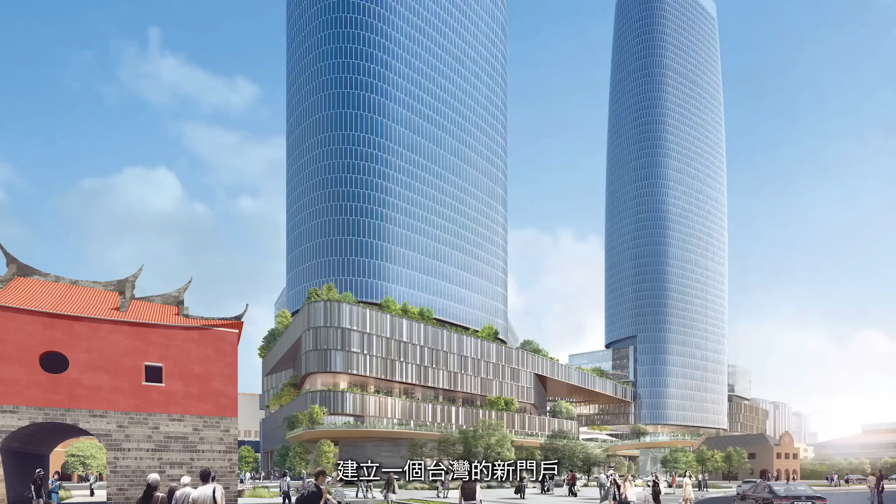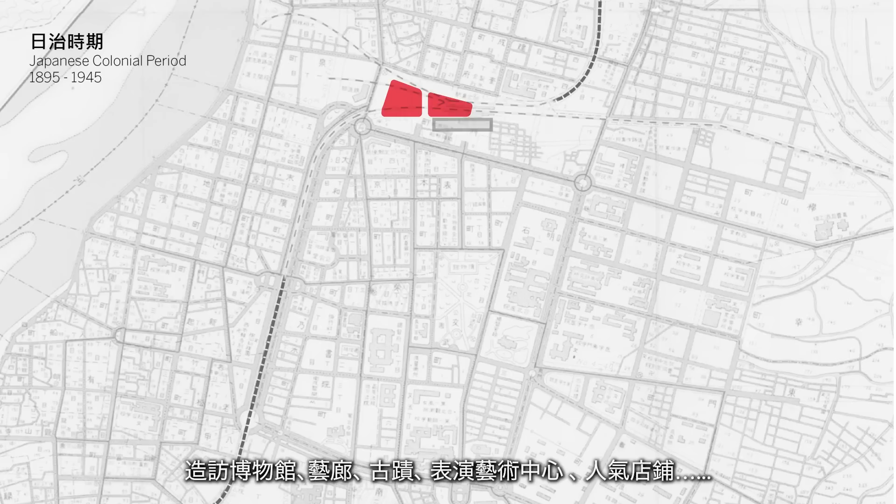Neighborhoods like this one, rich in amenities that bring together diverse populations as they visit museums, galleries, historic sites, performing arts centers, vibrant retail, and significant open spaces, are becoming increasingly valuable as people are more willing to embrace history.

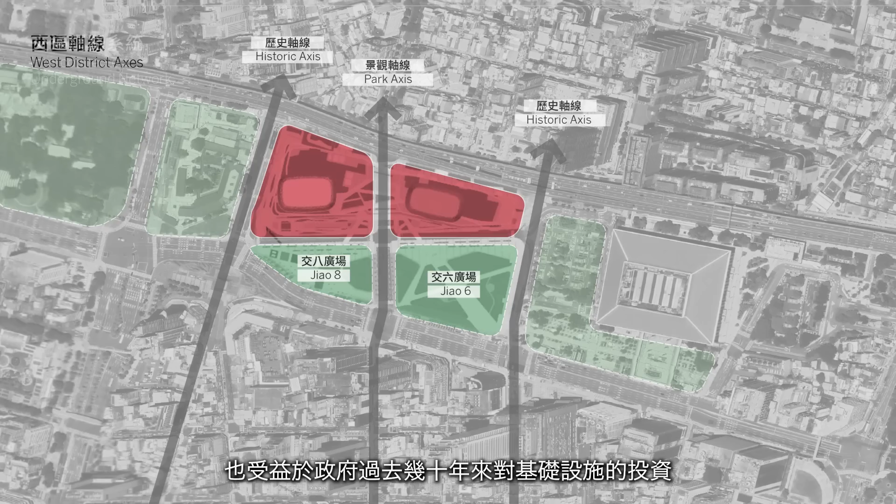This terrific site benefits not just from its history, but from the investment in infrastructure that the government has made over the last decades, including the new rail line and station linking this site to the Taoyuan International Airport. These important new links will weave together this development into the fabric of the city.

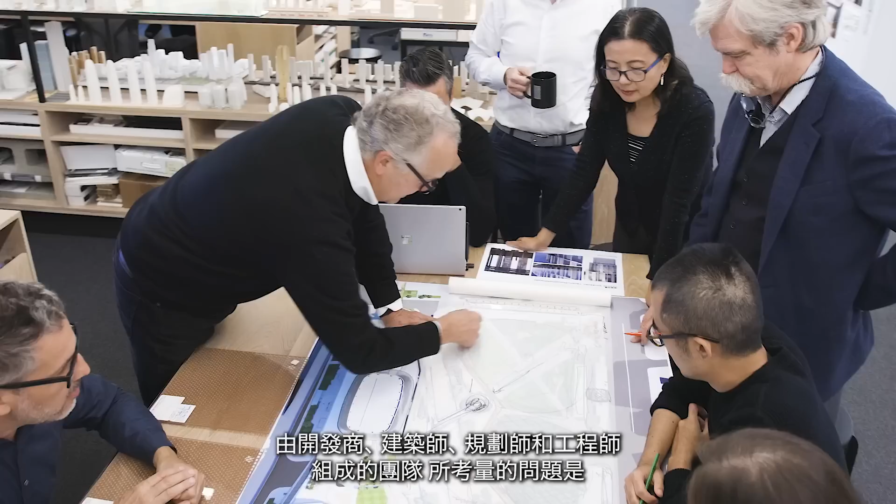The question for our full team, as developers, architects, planners, and engineers, is what is the most appropriate solution for the site? One that represents the welcoming and entrepreneurial spirit of Taiwan, one that redefines the skyline of Taipei, and one that establishes a new identity for the West District.

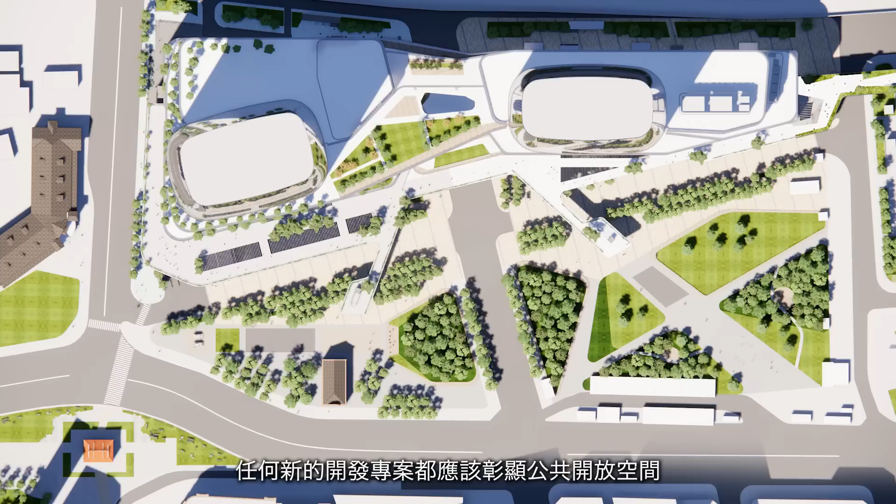We looked to many things for inspiration, but what resonated most with us was Taiwan's unique geography and natural resources, and the relationship between the Taipei Basin and its surrounding topography. As the city of Taipei has expanded, nearly the entire basin has been filled with buildings, making the surrounding hills and landscapes particularly precious. We believe that to preserve the exceptional character of Taiwan, any new development should celebrate open space and develop a strong integration between the natural and built environments.

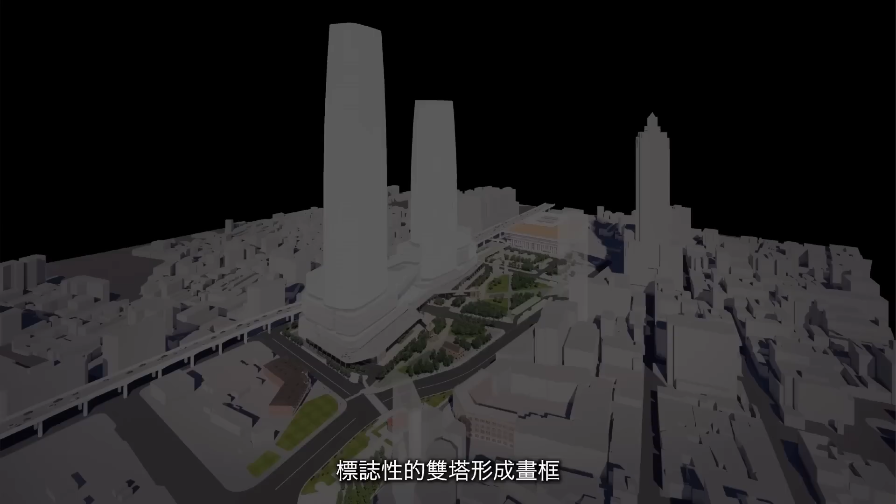The project works on two levels. On the ground, it creates a connection for the historic buildings and the districts. And above, it creates the conceptual link and visual connection to the Qixing Mountain. A pair of signature towers frames the view, bringing the landscape down from the mountains to the towers, as well as up from the park into the public spaces of the building.

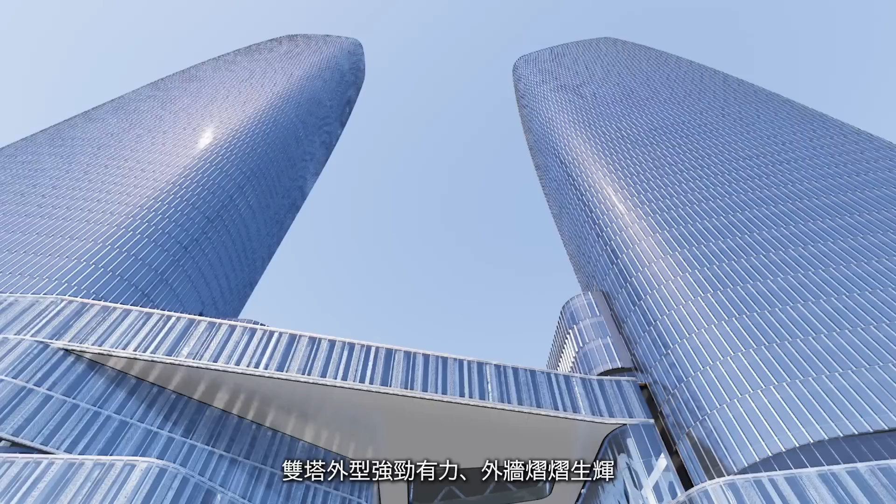The floor plans of both towers are elongated ellipses with broad faces to the north and south for optimal daylighting. The curves of each corner help reduce the apparent width of the towers and prevent them from forming a visual barrier between the historic city and the Qixing Mountain. The bold, powerful shapes of the tower are reinforced by the shimmering building skin that rises above the landscape and marks this as the gateway to Taipei.

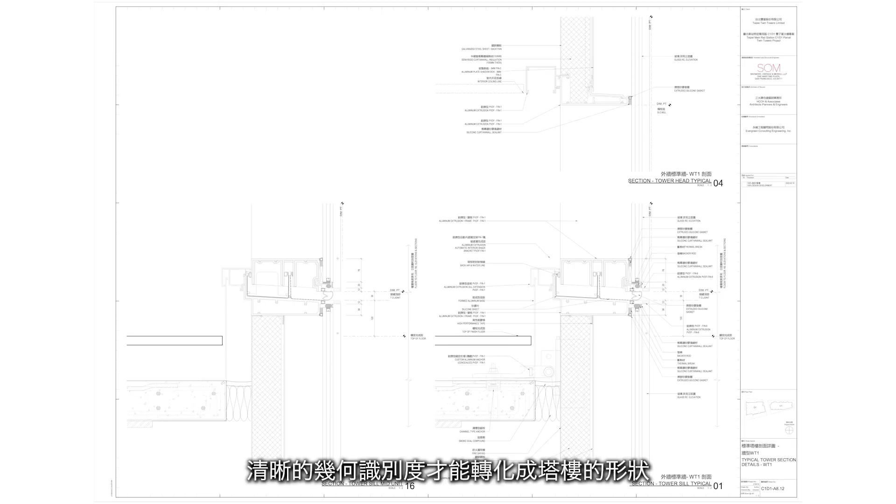The unique tower shapes are informed by the needs, which is the building use, the occupancy—those are must-haves. It's also informed by the wants, which are more of the attributes of what it wants to promote visually. The exterior enclosure design to achieve that also has needs and wants. In the design, it was critical to establish the geometry for the tapering form so that it could be readily identified and transferred to achieve the tower shape.

From there, through an iterative process of design, detail, and communication with the client and with local builders, materials were selected to achieve the visual objective and to provide the tapering tower form in a custom, unique enclosure that's designed specifically for this building, for the Taipei climate, and for all of the elements that it needs to address.

The two towers generously taper in form, gradually opening up to the sky and the views, while creating a welcoming gesture that holds the National Living Room.

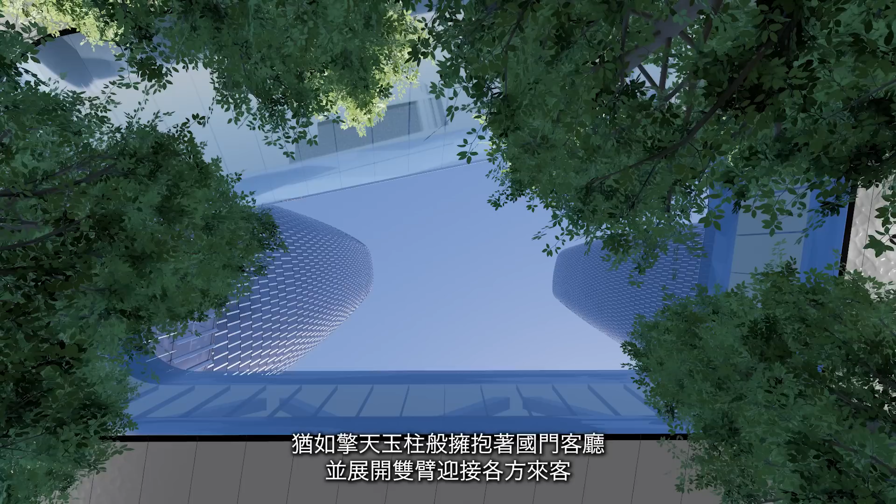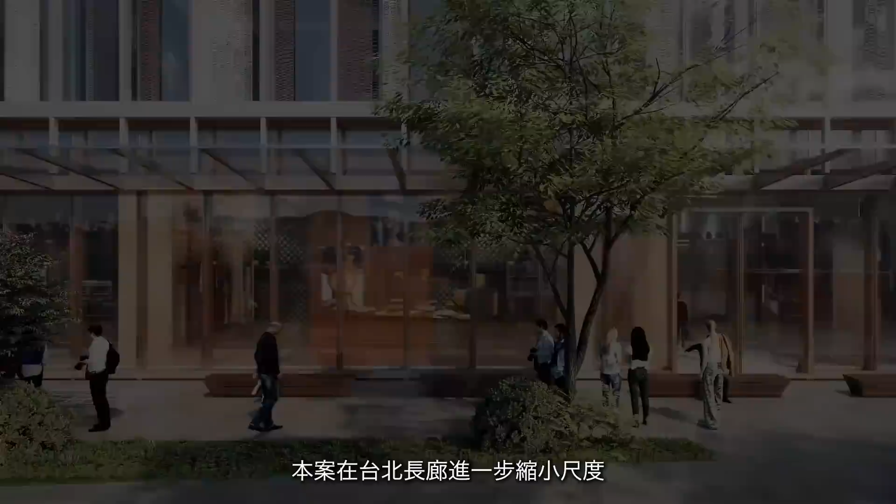The podium at the base of the towers scales the building down to the scale of the city and creates an important massing relationship with the adjacent Taipei main station. The project further scales through the Taipei corridor, which scales the project to the historic fabric into the park below.

This element, which stretches nearly 1 kilometer from the main station to the west side of the project, was really inspired by the city's shopping arcades. It consists of a double colonnade. It's a 2-story element.

It has elements of open-air trellises, and we hope through these elements it helps to recapture some of the atmospheric qualities of old Taipei. Because this is really the heart of the city, the heart of Taiwan, we want to make all levels of this project open to the public. We want to be able to allow people to ascend from the street level to the top of the podium without ever having to enter the building, and this is done through a series of really incredible landscape elements.

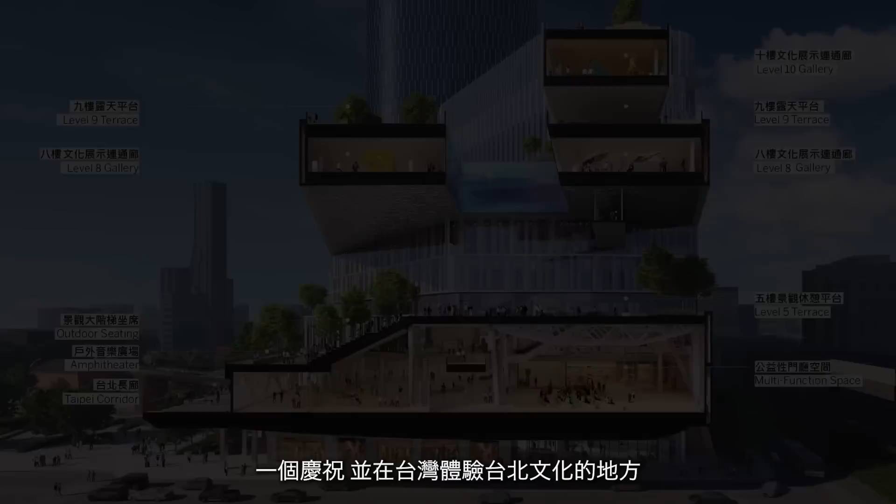The main feature of this sequence is the National Living Room. We see it as a multi-level event space, open 24 hours a day, a place for people to gather with friends and family, a place for celebration, a place to experience the culture of Taipei and Taiwan.

The National Living Room has a monumental stair that cascades down and forms a natural amphitheater. It flares open in plan to embrace the park and allow events to span across elevations. On the north side of the National Living Room, it opens up views to Qixing Mountain, incredible views.

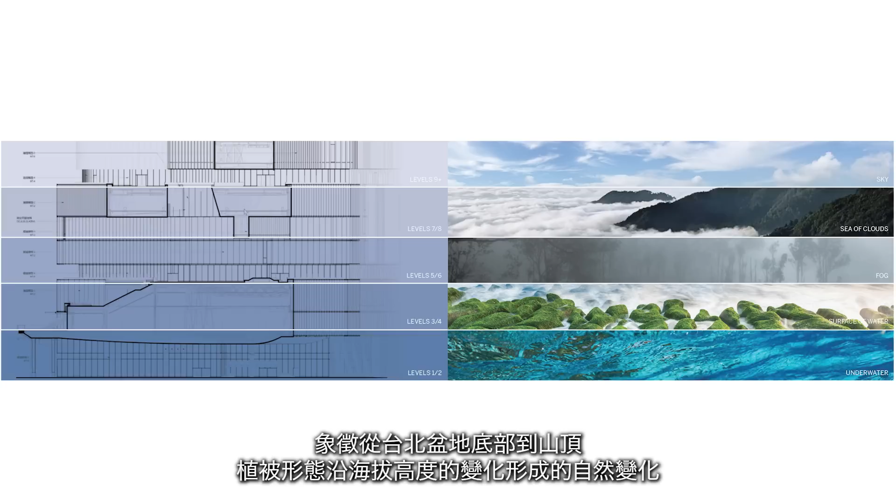As you ascend through the podium, the character of the landscape transforms, meant to mirror the landscape transforming through the Taipei Basin from the base to the top of the mountains. The National Living Room will be the heart of the city, an adaptive, transformative space that can accommodate all kinds of uses, from daytime lunches and marketplaces to events, concerts, and performances, to more formal events and celebrations.

Beneath the podium and in the foreground of Taipei Twin Towers is a public park, which hosts the Mitsui Warehouse, the Post Office, the Train Museum, and Taipei's historic North Gate.

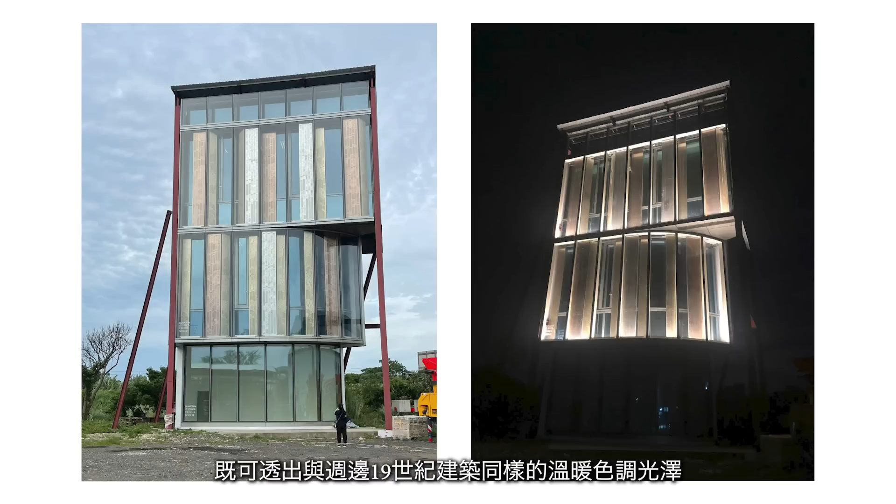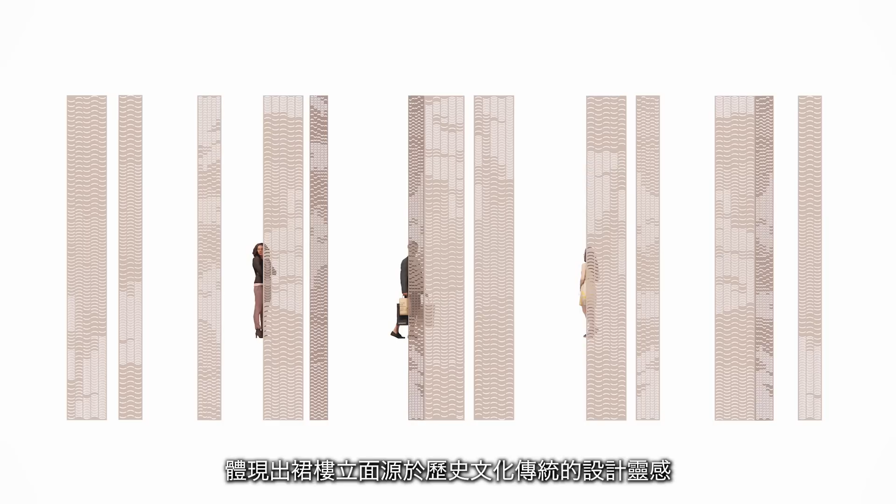Many of the attributes of the podium facade are inspired by these historic landmarks, notably its dynamic double-skin curtain wall, which glows with the warmth of the surrounding 19th century architecture while allowing daylight into the building. The copper and silver-hued metal screens of this facade, set into layers of glass, elaborate on the historic and topographical inspirations for the podium, with decorative perforations that evoke the wave forms of tea fields and the curves of stacked ceramic tile roofs.

We developed a dual wall, two layers, an outside and an inside, with movable interior screens to promote visual transparency, and to promote a dynamic and ever-changing exterior wall that will also accommodate and address the unique cultural aspects of Taipei and this site, and the climatic aspects of Taipei with its unique climate environment.

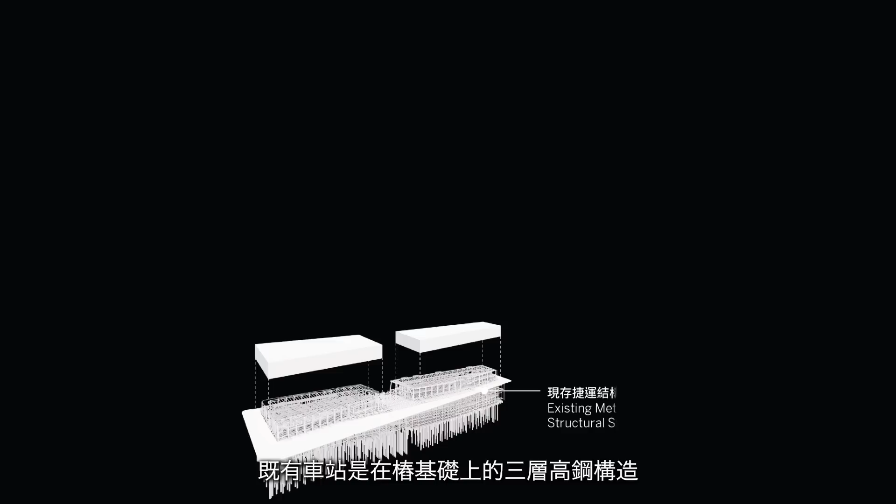One of the unique challenges of this site was to take two very tall buildings and create a structure that addressed the use of those towers, and then create an idea that transitions that structure into the existing train station that is active, which has three levels of structural steel built on pile foundations.

So what we did is create an idea that allowed our towers to actually be even taller than the ones originally designed, but shaped them in a way that allowed for the loads to be balanced and use the existing structure with very little change, with ideas that this structure could be built while the train station remained in operation.

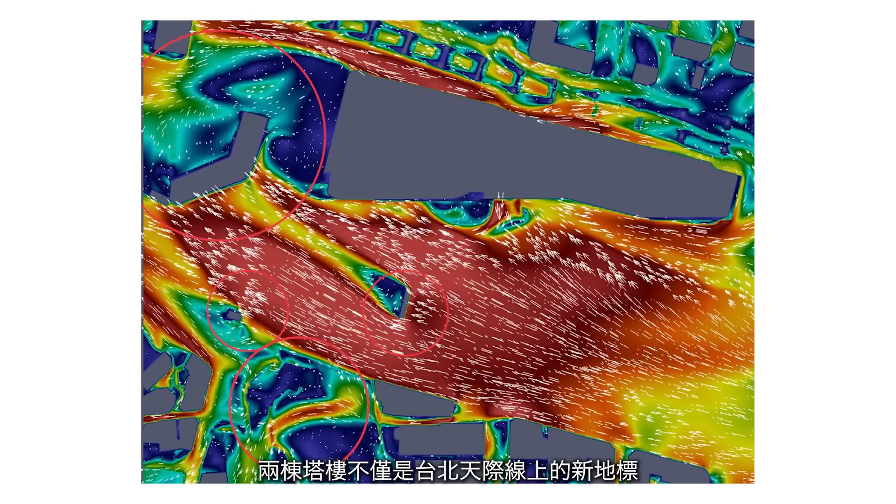The towers are not only iconic on the skyline in Taipei, but they're engineered to be aerodynamic. Typhoon winds in Taipei are significant, so what we've created is a structure that is elliptical in plan but also tapers over its height. In doing that, we're able to minimize the demands on this new structure, even allowing the towers to be taller than the original design for the site.

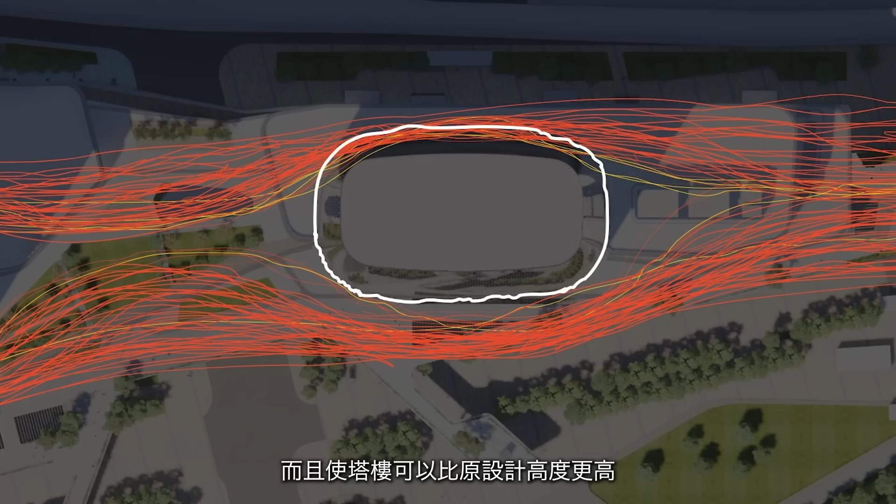Since the winds are so high in Taipei, we've come up with an idea to optimize its performance and resilience. We've introduced two sloshing dampers into the top of each one of the towers to add to the performance and enhance what we believe is already a very efficient structure.

We are thrilled that Taipei Twin Towers will be Taipei's first triple platinum project, achieving the highest levels of certification in LEED, WELL, and Taiwan's own EEWH. Every element of the design establishes dynamic connections between Taipei's cultural heritage and its progressive future.

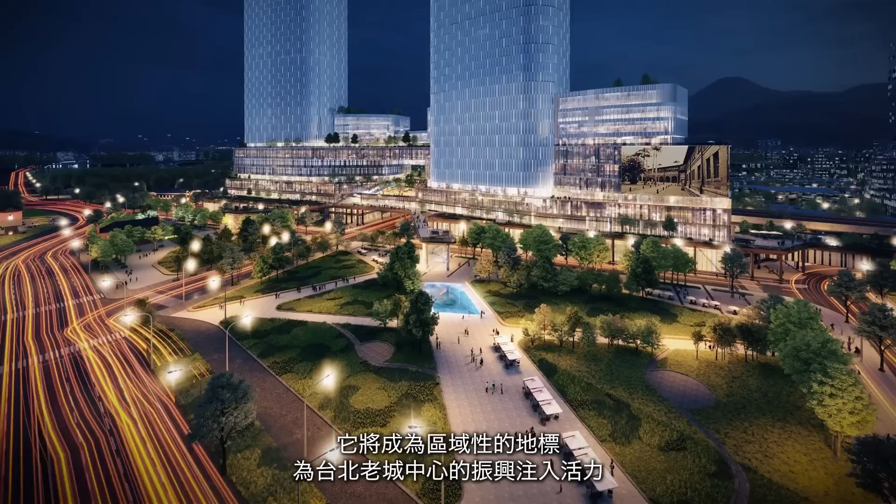Ultimately, we see the Taipei Twin Towers contributing on three levels. The towers form an immediate, welcoming place from the main station for arrival by train. They act as a marker for the district and energize the revitalization of the historic heart. And finally, they represent the future of Taiwan and act as a new gateway to the world.